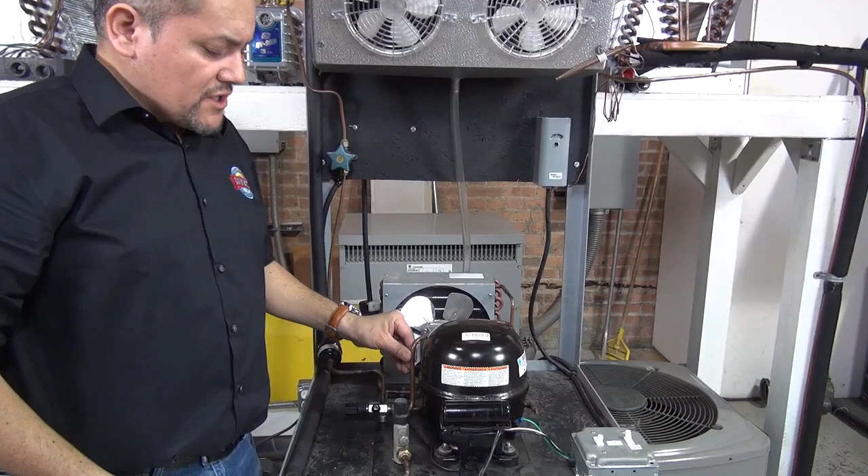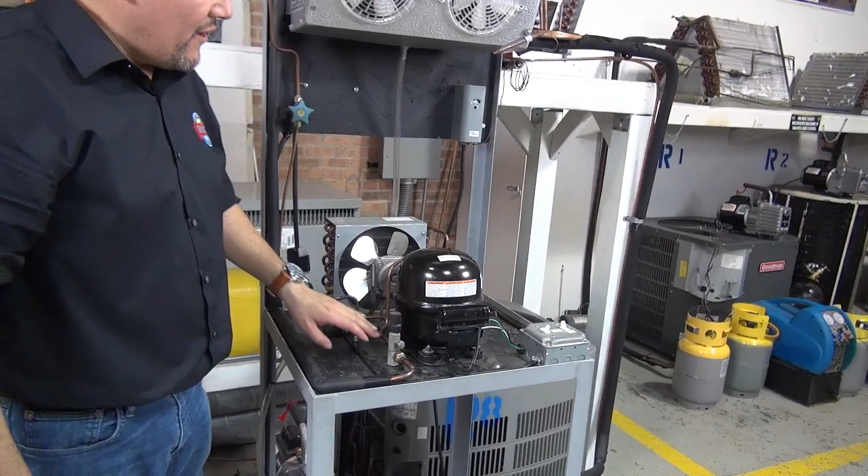Okay, so let's start with what's the function of the compressor. The function of the compressor, you guys get close a little bit, is pretty much to suction the refrigerant that's coming from the evaporator. This line right here, the one with the insulation, is the suction line. The freon goes from the evaporator down this way, around into the king valve and into the compressor. This is where the compressor is going to suction all this freon coming from the evaporator.

By the way, the refrigerant is 100% vapor, right? It has to be 100% vapor. Once that vapor refrigerant goes into the compressor, and this is the big deal here, the refrigerant is being compressed. As it is being compressed, the temperature and the pressure go up. So from, let's say, 26 psig on a cooler, you will compress up to 146 psig.

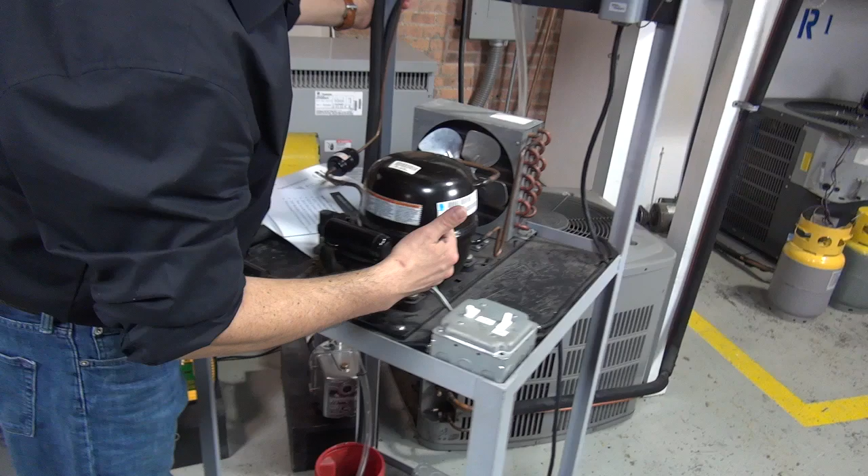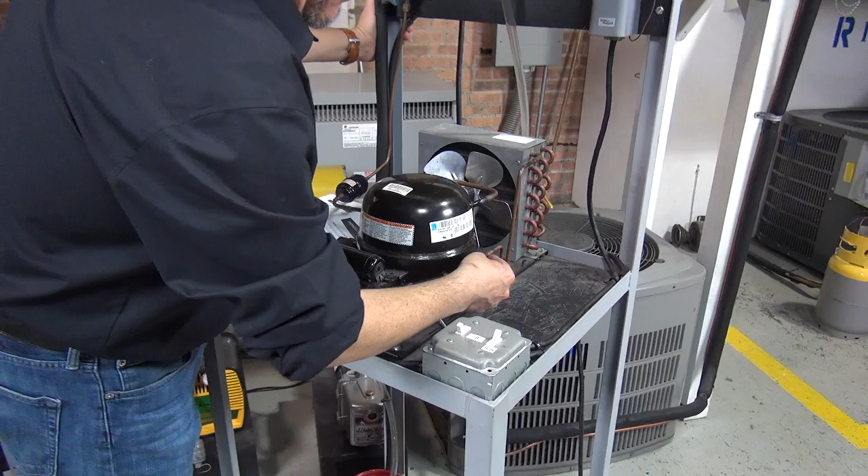Let me move the camera around. So the compressor sends the refrigerant into the condenser at about 146 psig. And by the way, I'm talking about a cooler. This is a cooler 134A compressor, right? So that refrigerant, 146 psig, high pressure, high temperature, goes into the condenser.

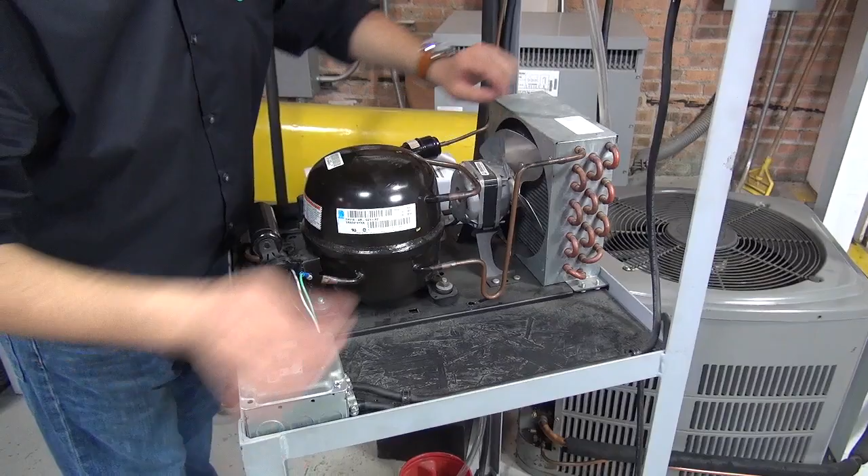Once it goes into the condenser, we've got a fan on the condenser, and the refrigerant moves through a couple of feet of copper. You can see all this copper, and as it moves through it, there will be a fan blowing air across the condenser, in which that hot, high pressure refrigerant will go down only in temperature, and then the refrigerant comes out of this pipe right here, which is the exit of the condenser.

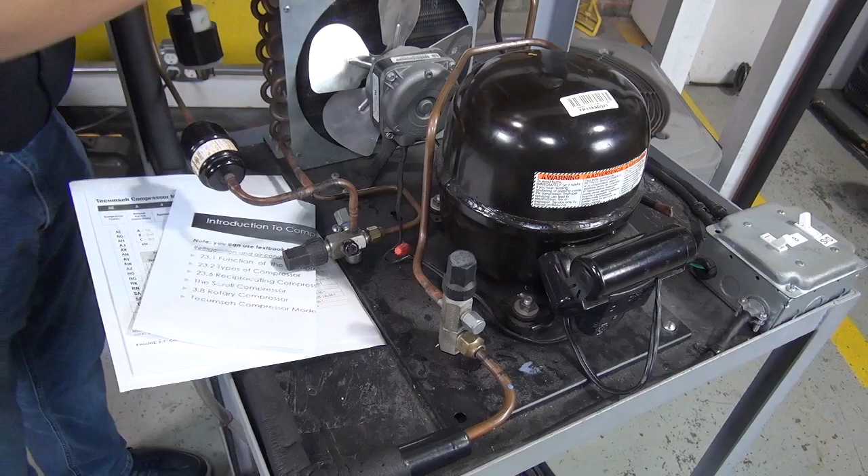The pressure would not change. The pressure will stay the same. The only thing that changes is the physical state of the refrigerant. It used to be 100% vapor, high temperature, and now becomes liquid. So the pressure stays the same.

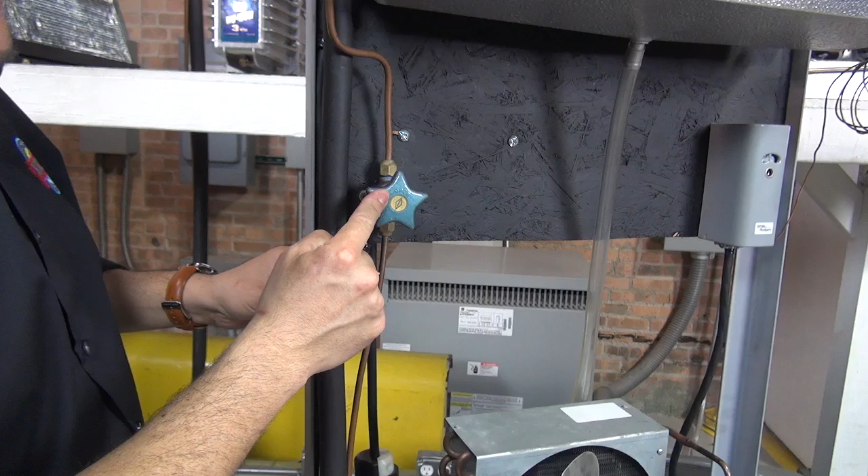Now the refrigerant will be 100% liquid, which then goes into the king valve, and from the king valve goes into the filter dryer, and from the filter dryer goes into a metering device, and from the metering device it goes into the evaporator. All this process here is 100% high pressure liquid refrigerant.

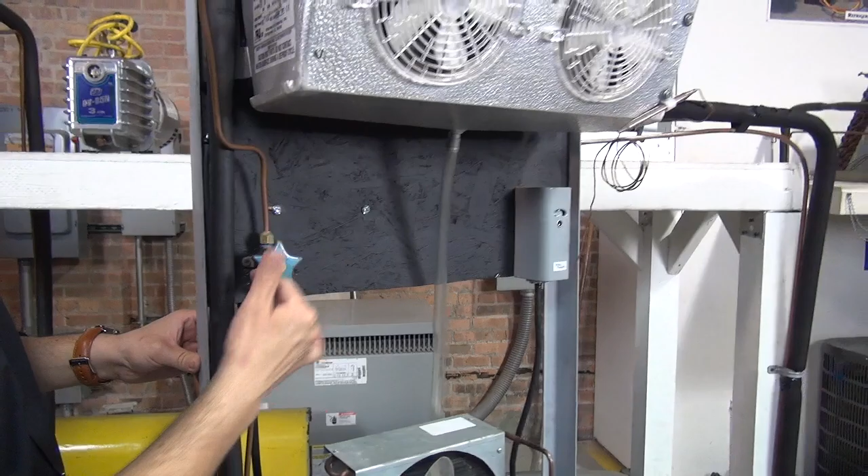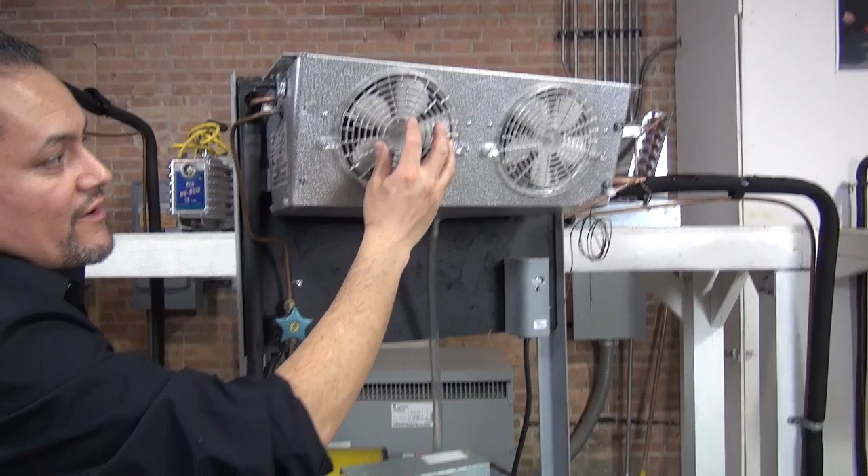As soon as it passes the metering device, this refrigerant is actually now boiling. So it will be liquid, low pressure, because this metering device is going to bring the pressure down. Liquid boiling into vapor, and once it goes into the evaporator and the fans are running, it's going to add heat from the space into the refrigerant, and now that refrigerant goes from liquid low pressure to vapor low pressure. And that's the way it's supposed to happen.

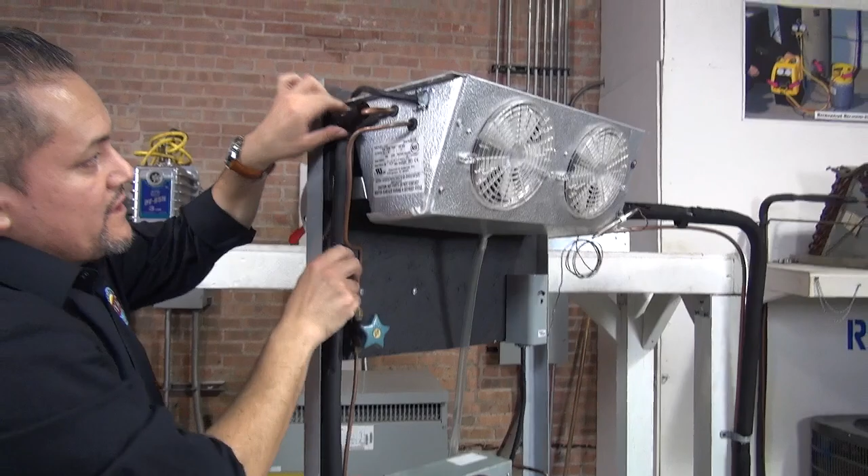Here in the evaporator, it has to come out 100% vapor, no liquid. That vapor comes out once again into the suction line, which is insulated, and it goes down into the compressor once again, and the process is repeated over and over. It all depends on the system; as long as the system is running, the same thing keeps happening. Okay?

This is just basic information, but it's a lot. When someone asks you what the purpose of the compressor is, you don't have to give all the steps. I just want to give that information to my students so they remember it, and there's going to be a video about it. But the whole process that I just explained is a good explanation of the whole general thing.

But just the basic information on what the compressor does: the function of the compressor is to increase the temperature and increase the pressure of the refrigerant. That's it. That's the whole thing. Increase the temperature and increase the pressure of the refrigerant. This will be 24 psig, and this will be 145, 146 psi coming out of the compressor.

All right, now we're going to talk about types of compressors. For example, this compressor is a rotary compressor, and we also have what is called reciprocating compressors, and we also have what is called scroll compressors. Scroll compressors are being used in this business and in refrigeration right now, so there are a lot of scroll compressors. They're finding out that scroll compressors are high efficiency and they work really, really good in refrigeration systems.

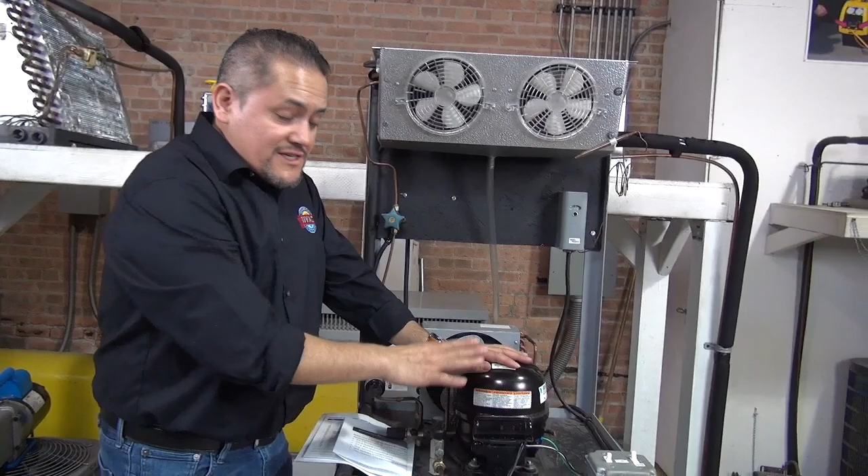Okay, so this is not a scroll. This is called a rotary compressor, and this is very common for refrigeration systems, for very small systems. A scroll compressor will be thinner and taller. That will be something completely different than this one, and that will be used for large refrigeration systems. Reciprocating compressors are normally a little bit bigger, and more heavy duty for air conditioning or for refrigeration.

So in this case here, this is a rotary compressor. It's really good. It's high efficiency too, very, very good. It's only for a refrigerator, it's not for a big system. Okay, so that is the types of compressors.

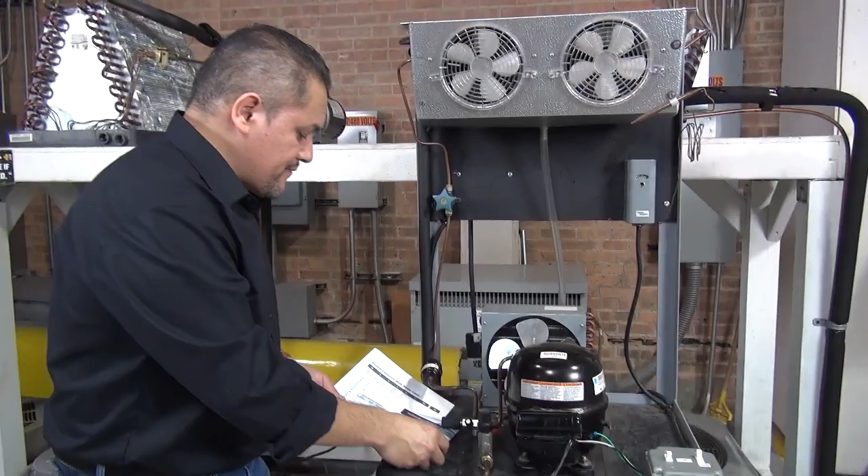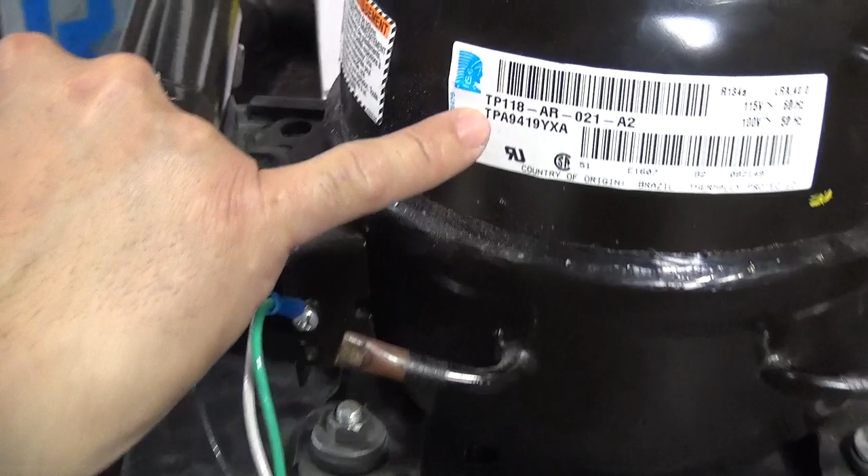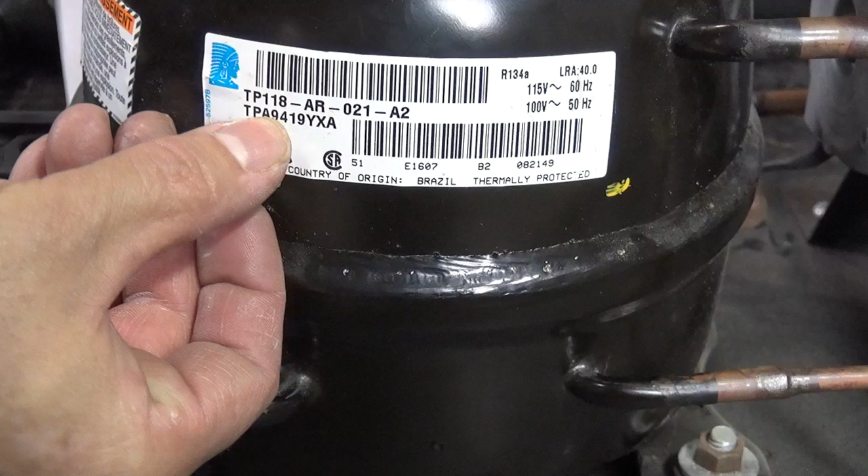Now let's move into the model number of the compressor. Let me put the system to the side, and if you get closer to the camera, there will be two numbers here on the compressor. They look very similar, right? This one at the top is not the model number. It's always going to be the one at the bottom for Tecumseh compressors. So my model number is TPA9419YXA. All this information will tell you the voltage, the application, the refrigerant, all this stuff.

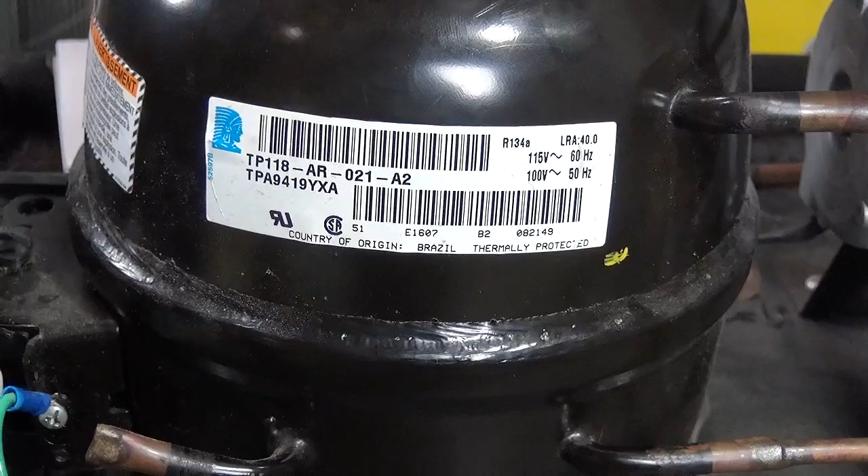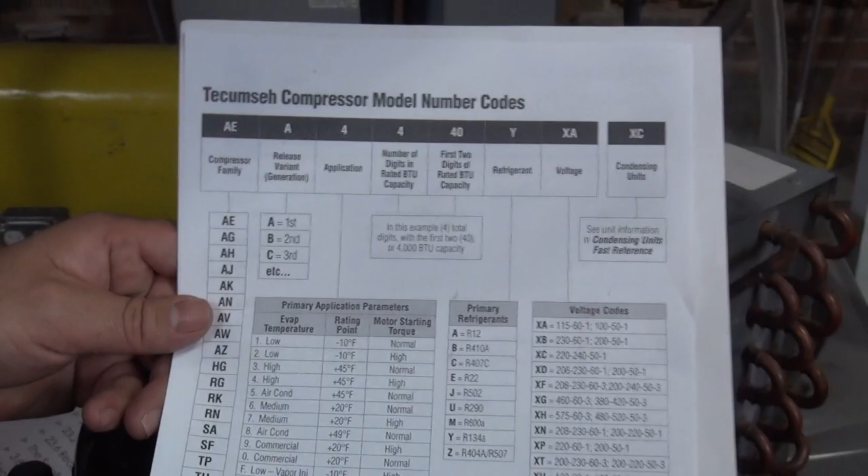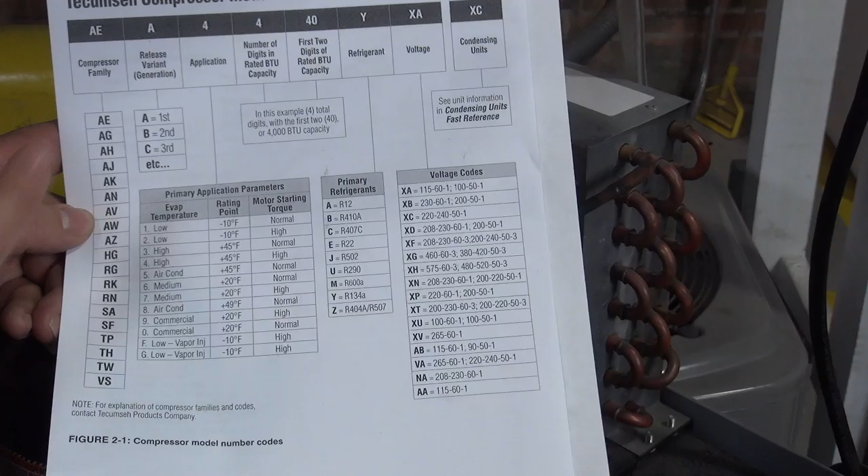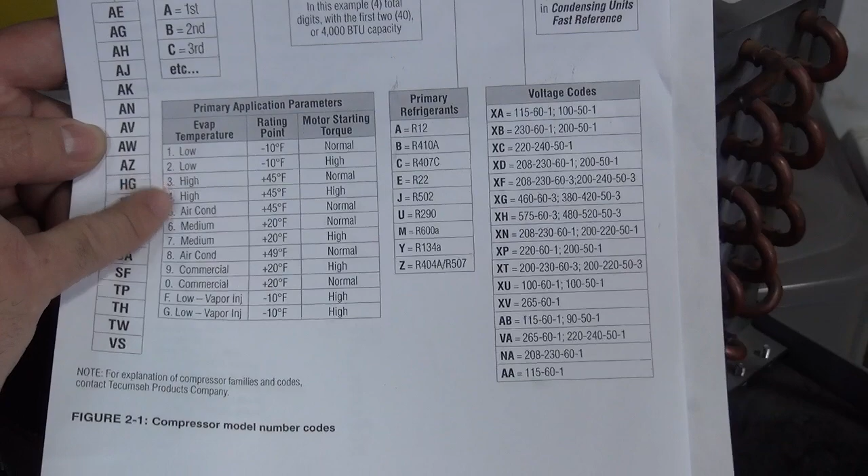How can I find out from this? Well, right here. This is a chart that I send to my students, and by the way, you don't have to pay for this. You can download it from the Tecumseh website. It tells you what every one of those letters stands for. I don't have time to go over everything, but let's find out about the application. The application for this compressor could be low temperature, high temperature, air conditioning, or medium temperature. Let's take a look at the number.

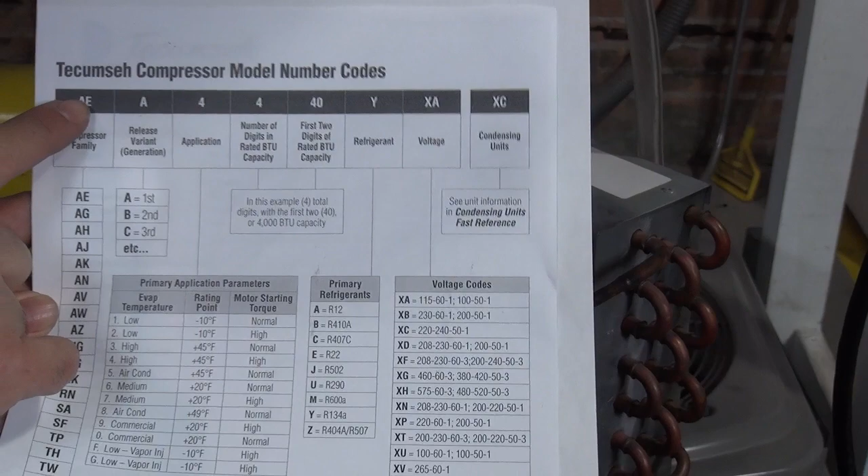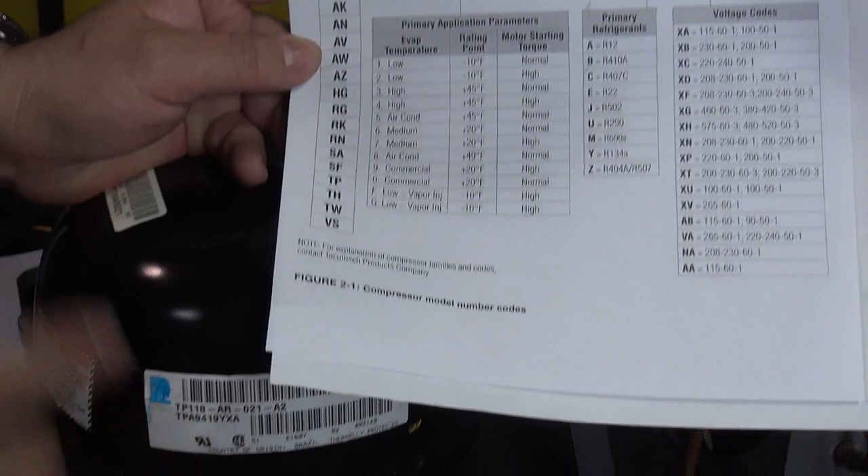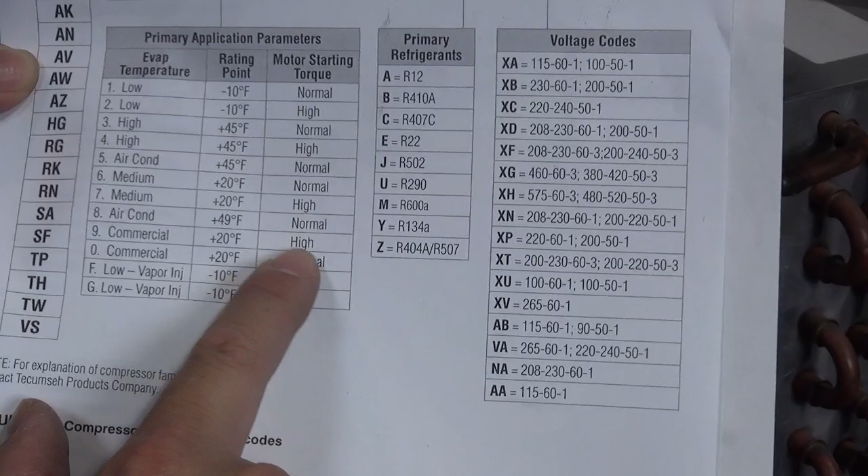It says the application will be the first number after the three letters. So it says A4. I'm sorry, let's go back to the model number. It says TP, that's the two letters, then A, and then a 9. This example is a 4, but my real compressor has a 9. So let's follow the number 9, and there you go. Number 9 says this is commercial, plus 20 degrees, high motor starting torque, rating point plus 20 degrees, and this is for commercial.

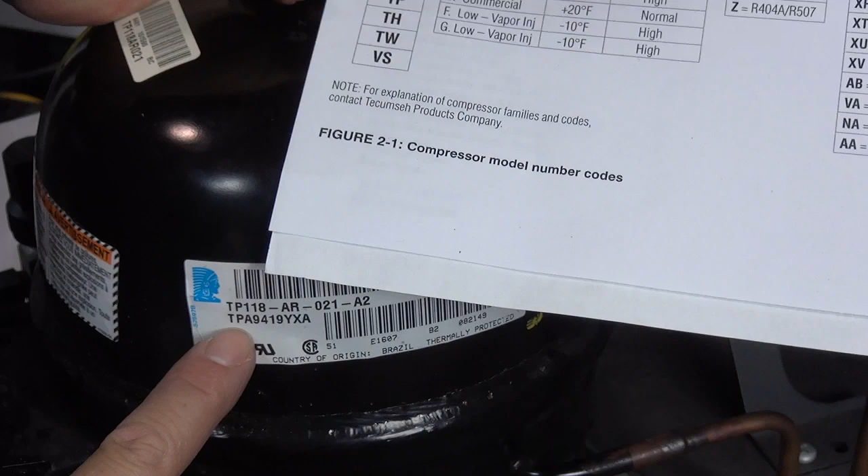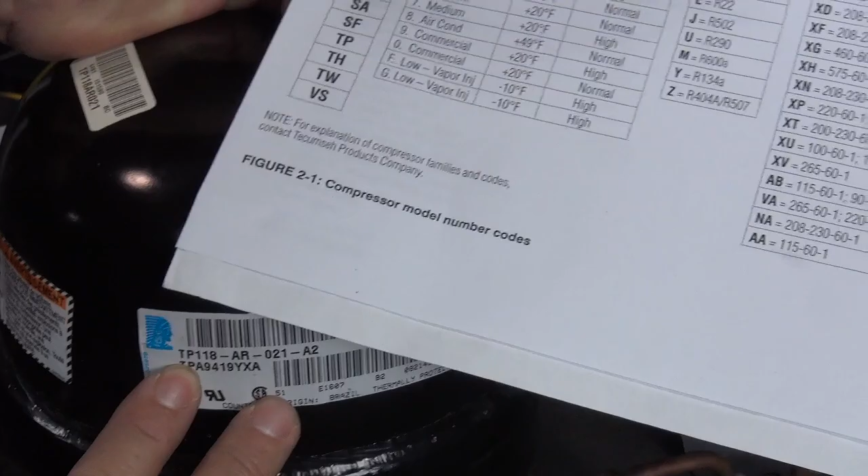Because we have TPA, let me double check that. Yep, a 9. Is that right? TPA, release variant, application, yeah, that will be the 9. And the 9 is commercial plus 20. Okay, so there you go. That's my application, 9, commercial plus 20.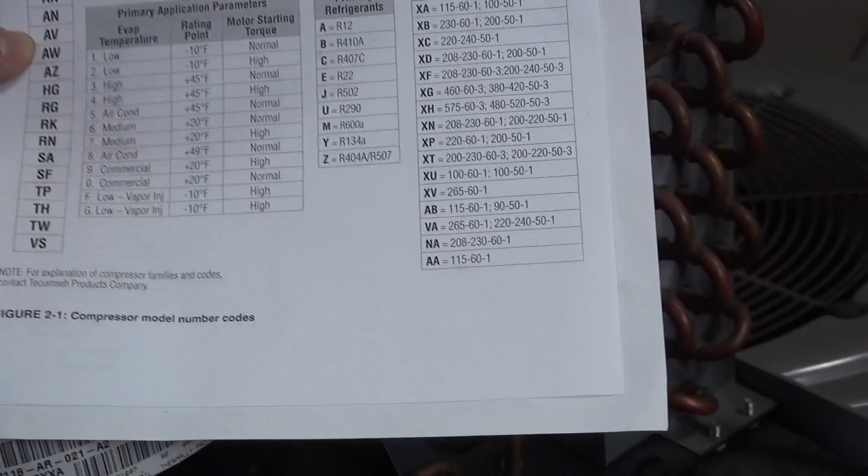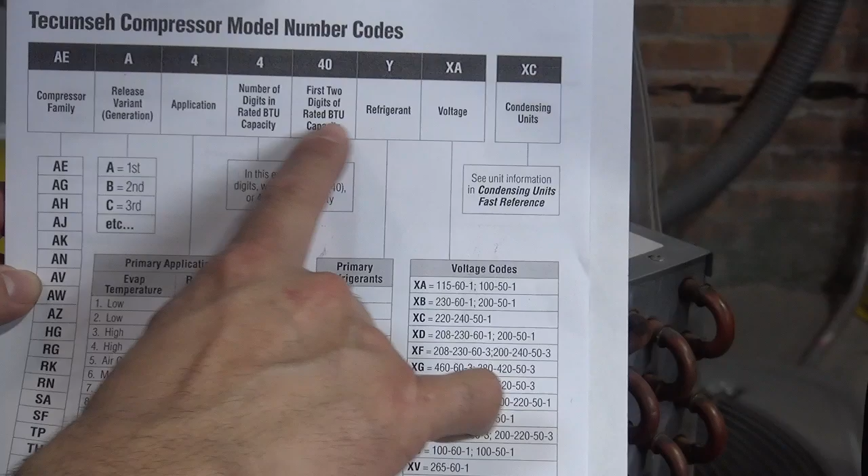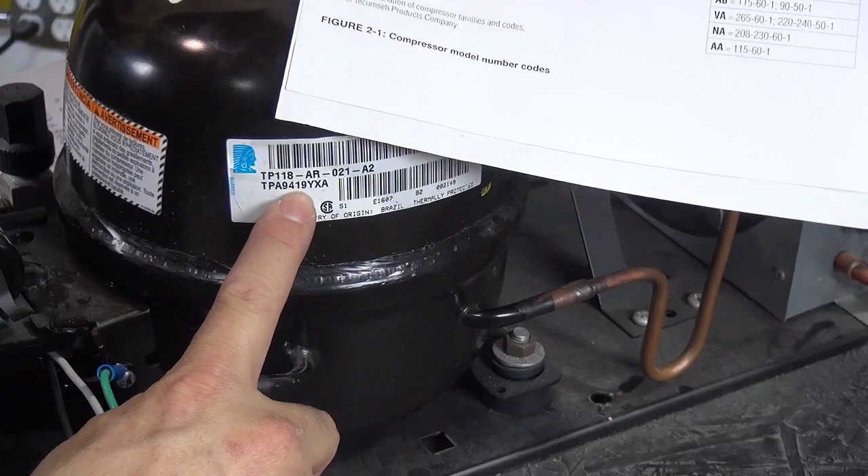Now let's take a look at the BTUs. The next number is the number of digits of the rated BTU capacity, and then the first two digits of the rated BTU capacity. So after the 9, I have 4. The number 4 says there will be 4 digits total in the BTU capacity. And then I got a 19. So to that 19, you add 2 zeros. So this compressor is 1,900 BTUs. Once again, remember what it says here.

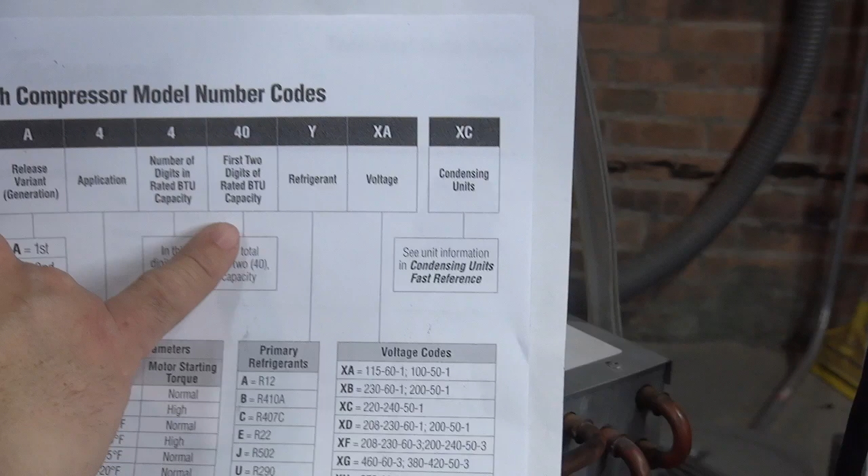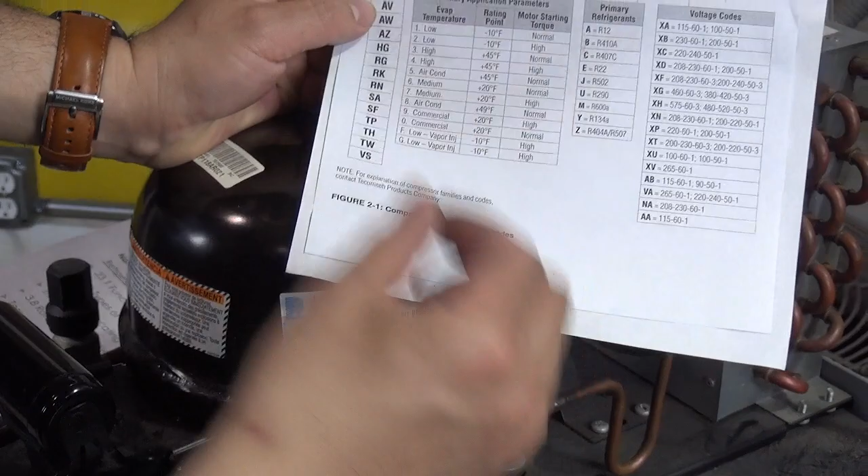Numbers of digits in the rated BTU capacity, all right? And then here, first two digits of the rated BTU capacity. So number of digits, in this case, this example says 4, right? And this example says 4 again. So you gotta count 4 numbers, okay? And then first two digits of the rated capacity is 40. So four total numbers, and you get a 19, so it's 1900. So it's 1,900 BTUs, this compressor. This is the BTU capacity.

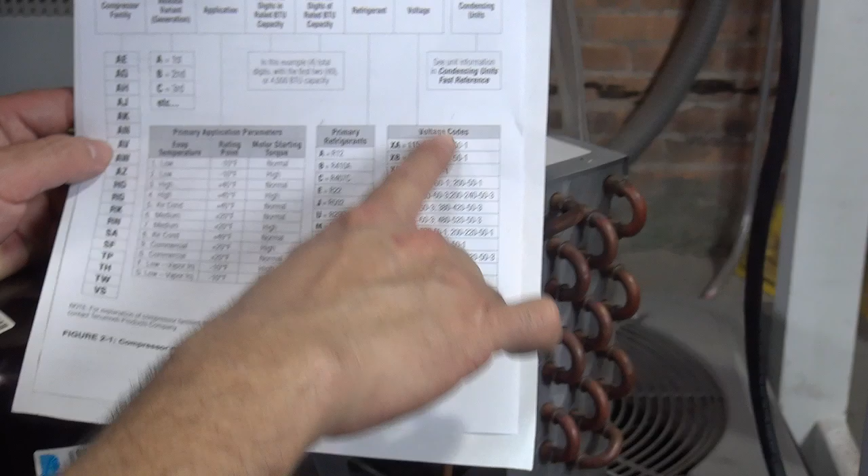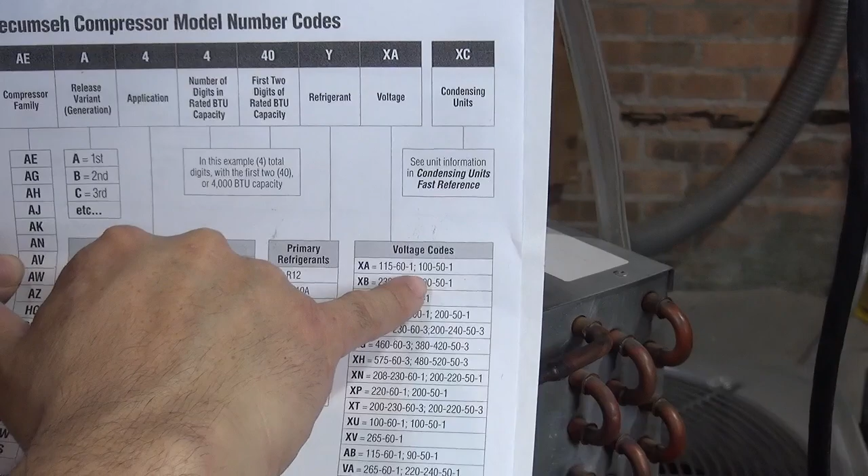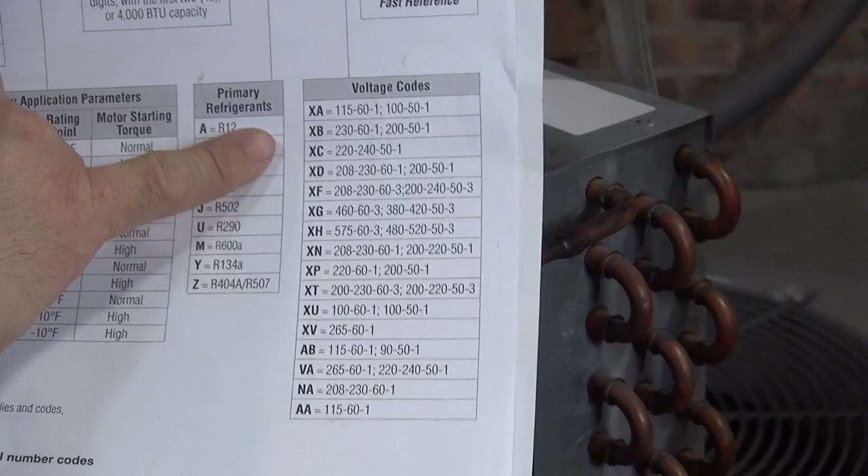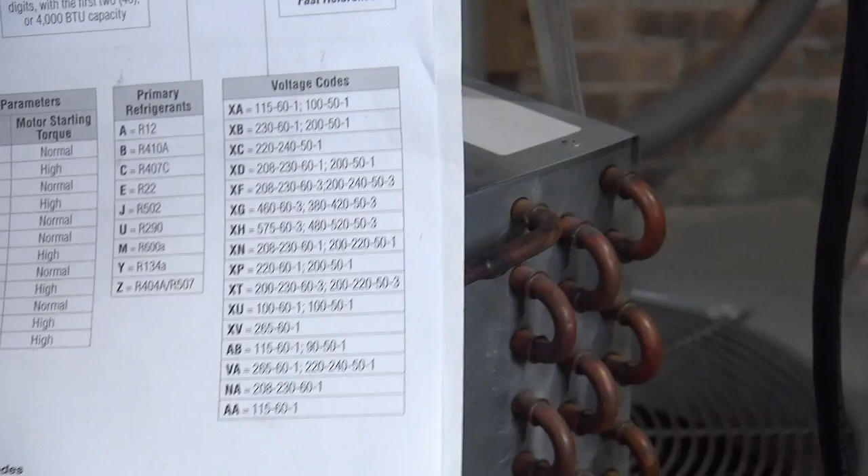And then also we're going to talk about the voltage. What's the voltage going to this compressor? XA, this example, and the XA example is supposed to be 115 volts, 60 hertz, one phase. Okay? On this compressor, it actually is YX. Let me see that. Actually, yeah, it's YX. And the YX, that would be wrong. Actually, let's see, 9XA. No, it's XA, I'm sorry. It's the last two digits. Yeah, because this one doesn't come out here. So it's XA. XA is 115 volts, 60 hertz, single phase compressor.

Okay? So this is a little bit of the information and how to identify the BTUs and the voltage of this compressor. So this compressor will run at 1,900 BTUs. All right? Now, I did my homework and just to show you how to use this to identify the compressor, but then also I went to the website because, by the way, if you cannot get the information using this table, go to Google. Go to Google and just type in Tecumseh and the model number of the compressor, and this is what I got from the website of the Tecumseh.

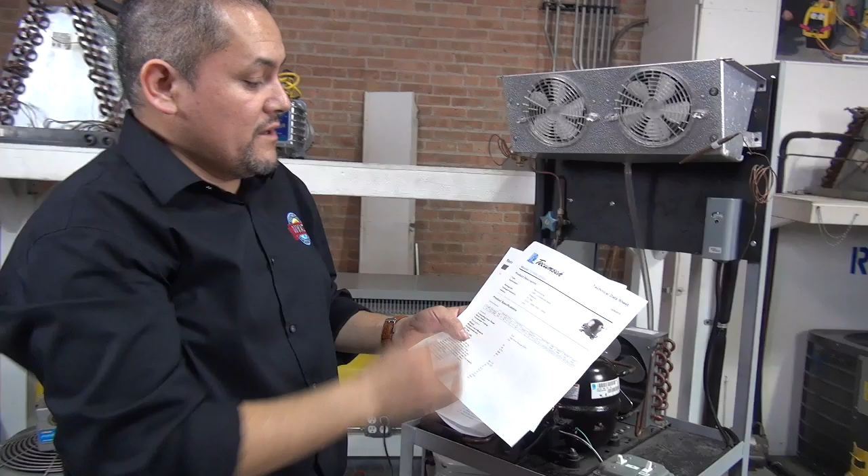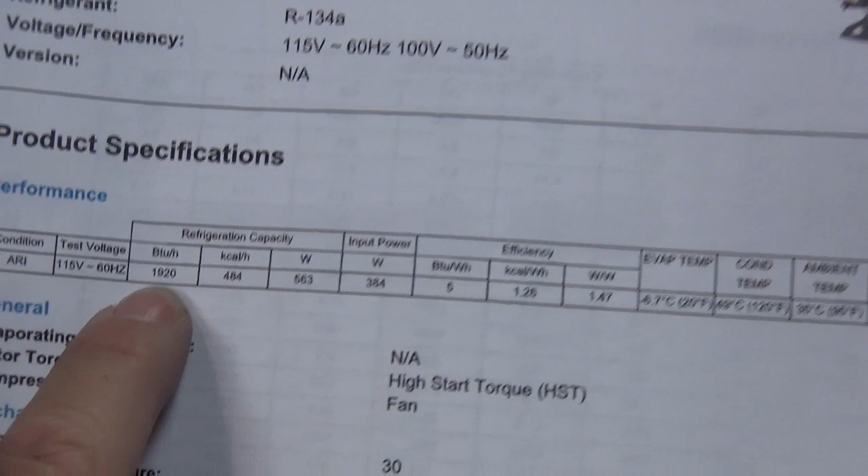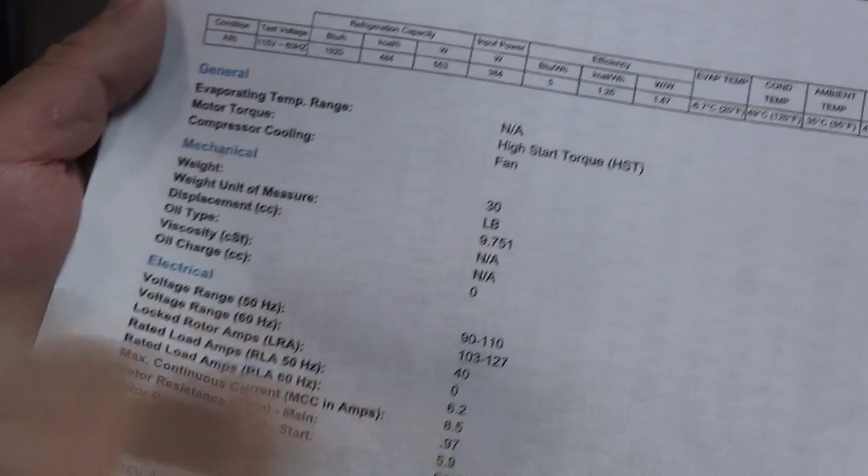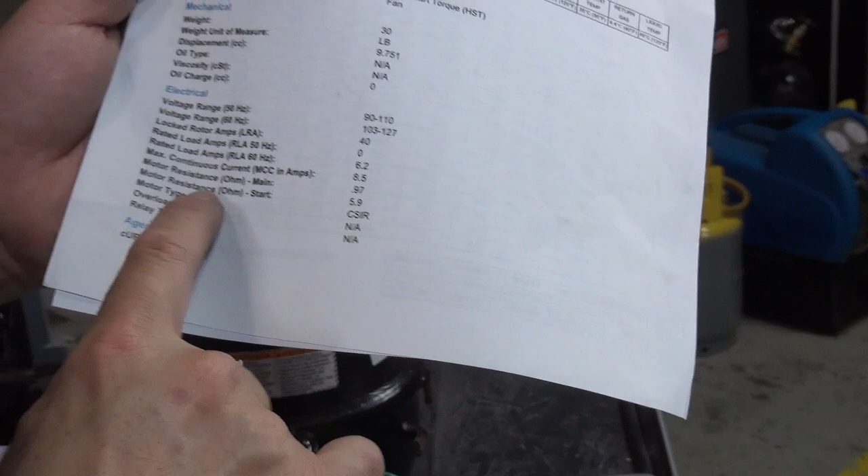And once again, motor torque, high starting torque. Look at the BTU capacity right there, 1,920, and that's the number that we find out with the special chart with this one. So once again, you can do the internet, you can do the chart, and right there, 1,920 BTUs. Then also gives you the weight of the compressor. Another important information, it also gives you your resistance. Motor resistance ohms, the main winding, which it says, I believe, 0.97, and motor resistance ohms to start winding 5.9. So that's good information to find out if the compressor is electrically fine, okay?

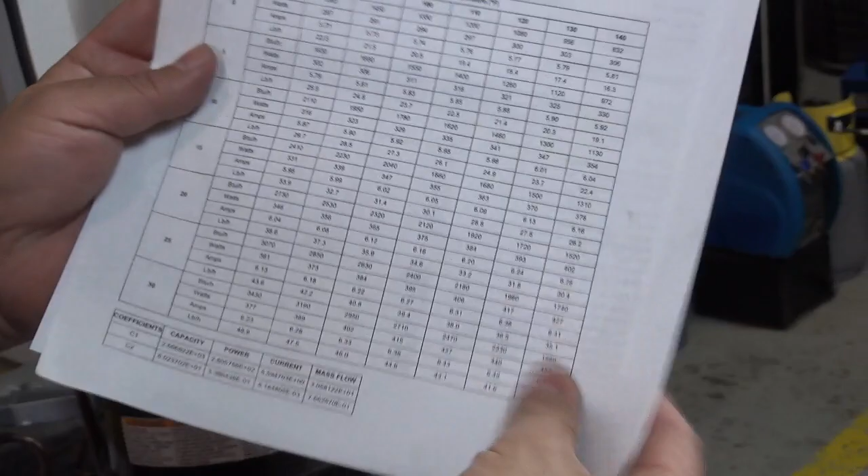More information, and this is a really good one here. Look at what happens here real quick. We're gonna go over this real quick. Evaporator temperature, by the way, this is a cooler. So on a cooler evaporator temperature, you're talking about 25 degrees right here. So here we go. On a 25-degree evaporator temperature, and then we got the BTUs, right? Let's say the temperature outside is about 80. 80 degrees is a perfect temperature for a condenser. 80 degrees, 25 degrees evaporator, look at the BTUs, 3,070. So if your condenser is at 80 degrees outside temperature, you should be able to get 3,070 BTUs per hour.

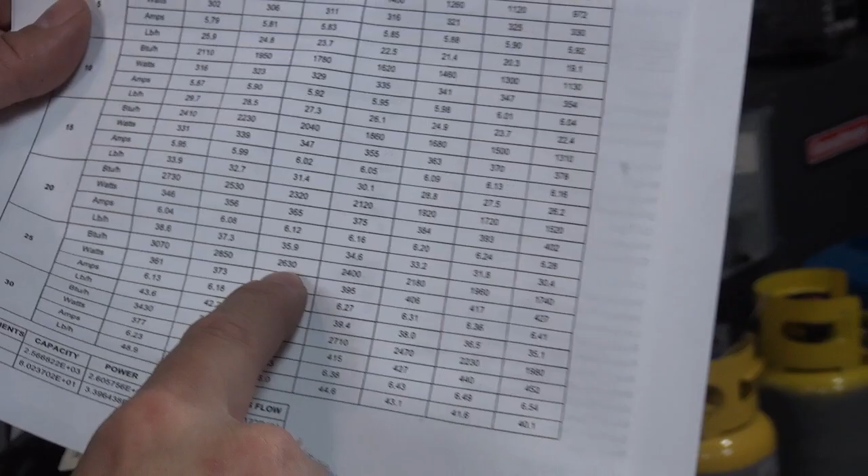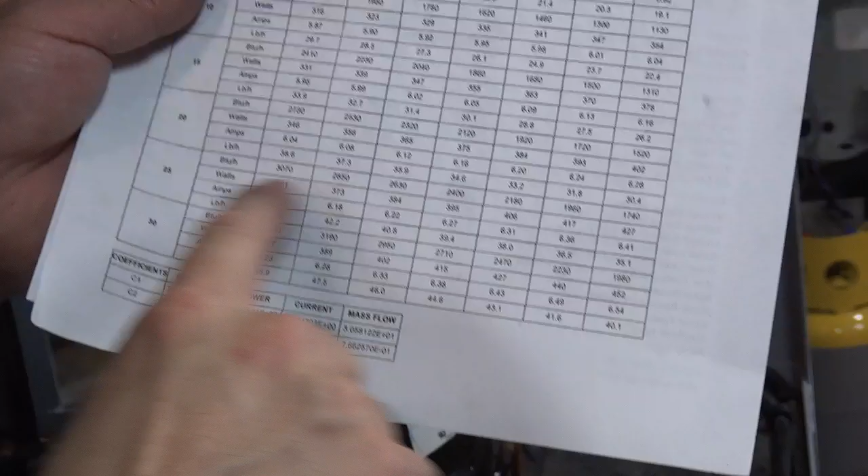Look what happens when you expose the condenser to a higher temperature. Look at 90 degrees. Now what happens? 2,850. What about 100 degrees? What if it's 100 degrees in the restaurant? They don't have air conditioning. Look what happens. 2,630. So what I'm trying to show you here, guys, is that the hotter the temperature outside is to the condenser, the less BTU capacity you're going to get. Look if it was 140 degrees. Look at what happens to the BTUs.

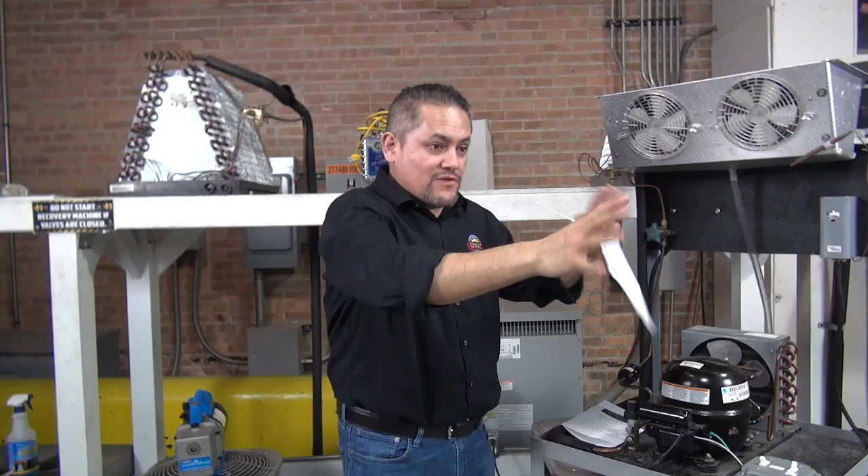1,740. Okay? So the whole point of this, when we do refrigeration, is that with high temperatures to condensers like this, BTU capacity actually goes lower. And if the temperature inside the cooler has been between 38 and 40 degrees, everything is fine even if the compressor's outside temperature is 140. Everything should be fine.

But let's say you change the start capacitor to the compressor and the temperature outside is 140, for example, right? And you wanted to bring the temperature on the walk-in cooler from room temperature, 60 or 80, down to 38, 40, this is going to take time. Why? Because the temperature outside is too hot, and this is going to make this compressor run less BTUs. Okay, so it's important you guys understand this. Hot temperature to the compressor is a big problem.

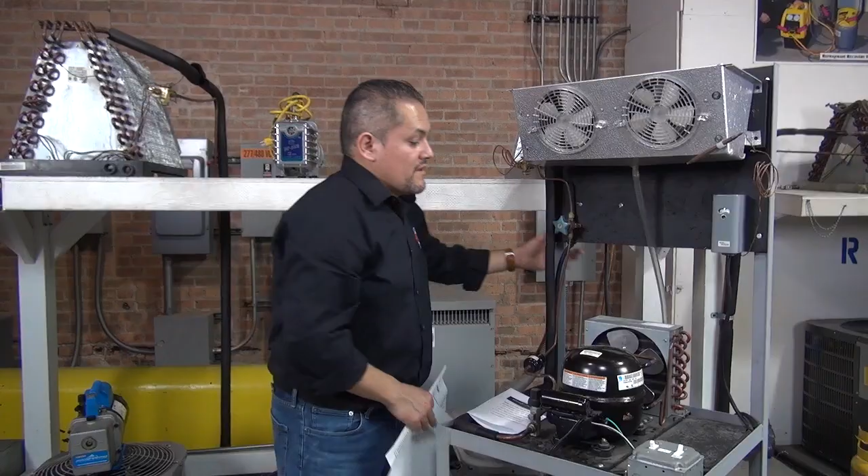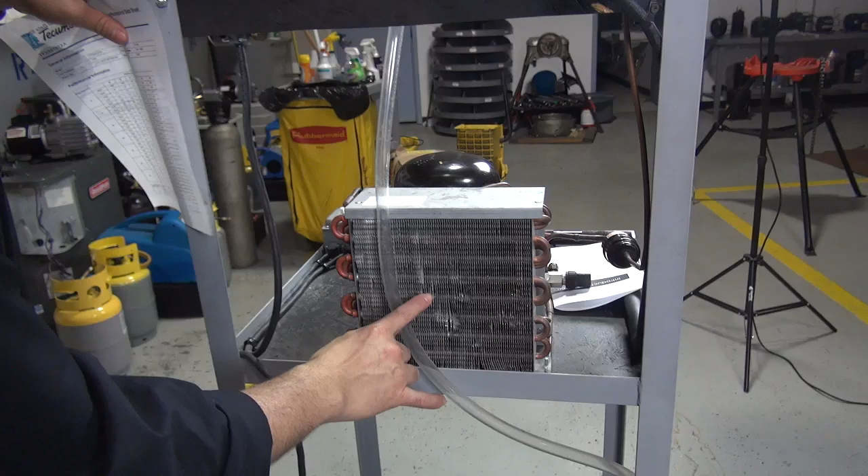And of course, you're always going to make sure that your condenser, this is your condenser right here, make sure that it's clean. Sometimes your condenser is just going to look clean like this one, all right? I've had some experiences where it looks clean, but then I grab my air compressor and I just blow through it, and you're going to see a lot of dust coming out. So when you look at it, it looks clean, but once you start cleaning it, you're going to see it's really dirty. So sometimes it's just dirty inside where you cannot see it, right?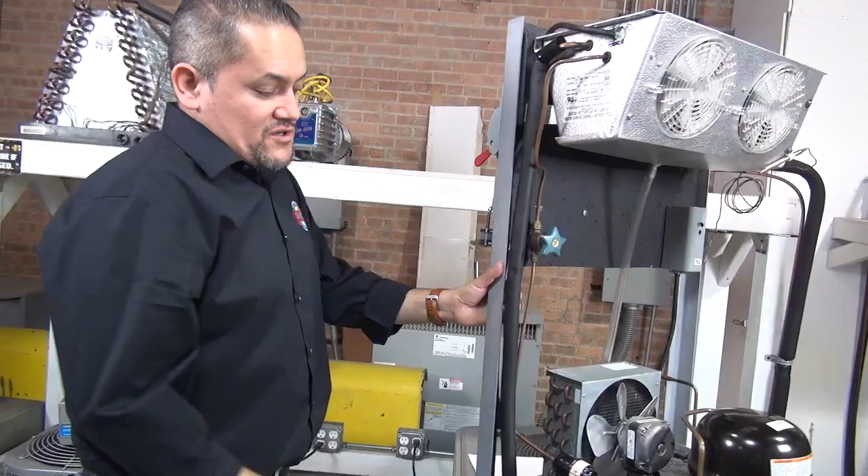So it's preferred to use pressurized air to clean the condenser. Cool? Now, the other thing I just want to cover real quick is the compressor capacity. Remember, what was the capacity? 1,920 BTUs, this compressor.

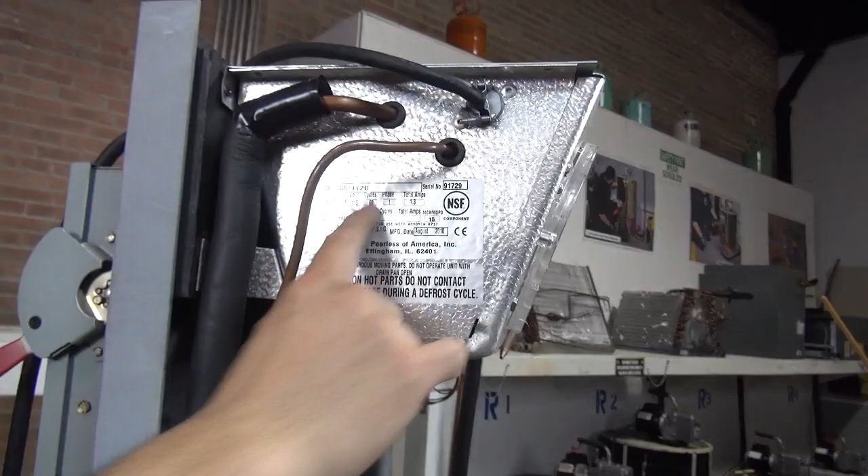All right? Now, let's take a look at this evaporator. This is the MG120, so this is a 1,200 BTU capacity evaporator. So it seems like this is about 800 BTUs more than this evaporator. Okay, that's what it looks like capacity-wise. Okay, this might be a little bit big for that evaporator. But I want you guys to understand something.

We're talking about refrigeration systems. Remember, let's say this is a unit for a restaurant, one of those restaurants that are really busy, okay? How many times do they open the doors of those units? When they're preparing the sandwich, when they're making the pizza, how many times do they have to open those coolers back and forth? A lot of times. And every time they open it, heat gets in. By the way, heat moves to cool. Heat will move inside into the cooler. So that makes this compressor work pretty much all day.

Just think about this. If this compressor's BTU capacity was designed perfectly for this evaporator. This is 1,920 BTUs. Let's say this was 1,900 BTUs. If this capacity is the same as this capacity, just imagine those days when it's going to be really hot. Let's say they didn't clean the condenser. Let's say the temperature in the restaurant is really, really hot because the air conditioning went down. What's going to happen if it's the same capacity? Then the compressor is not going to be able to handle it.